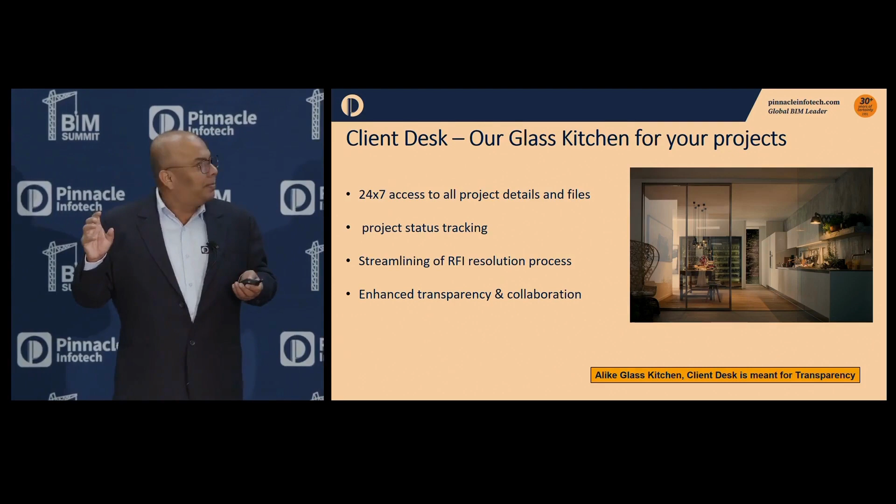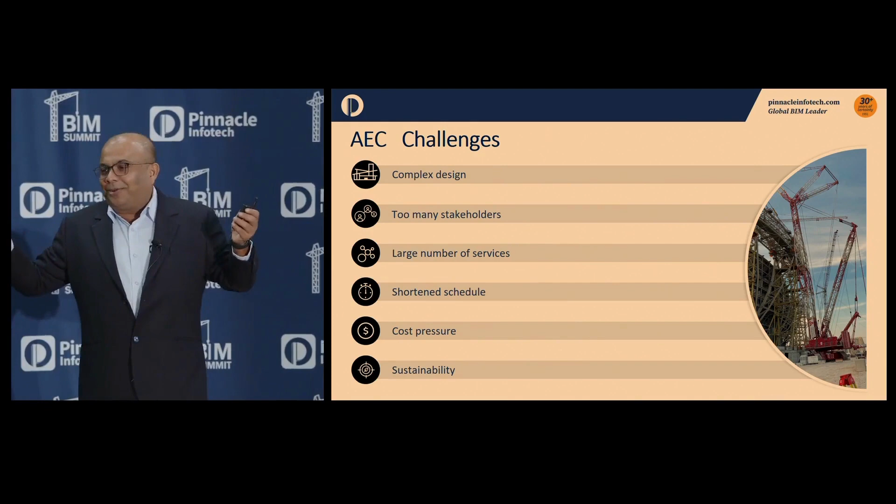Friends, our industry is very complex. Because we are working in different countries, architects don't want any columns, they don't want to give any ceiling space. They want crazy structures, the kind of things we see around the world, especially in the Middle East - the structures we see in Saudi Arabia or Dubai. Now everybody is competing for that. We have too many stakeholders.

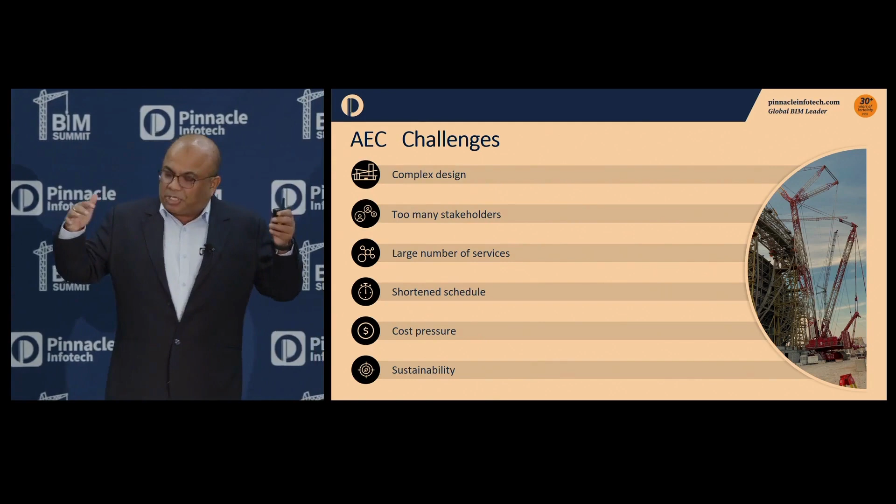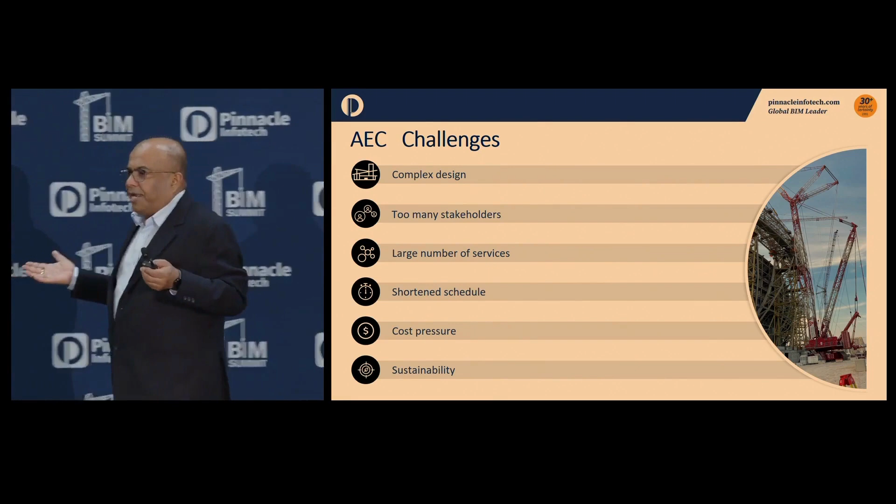Today, any specialty hospital or airport has at least 25 to 30 consultants, and definitely 30 to 40 sub-trade contractors, all working towards the success of the project. How do we collaborate between them? The number of services is increasing every day. 20 years back, airports and hospitals were very different from what we have today - the number of services has increased.

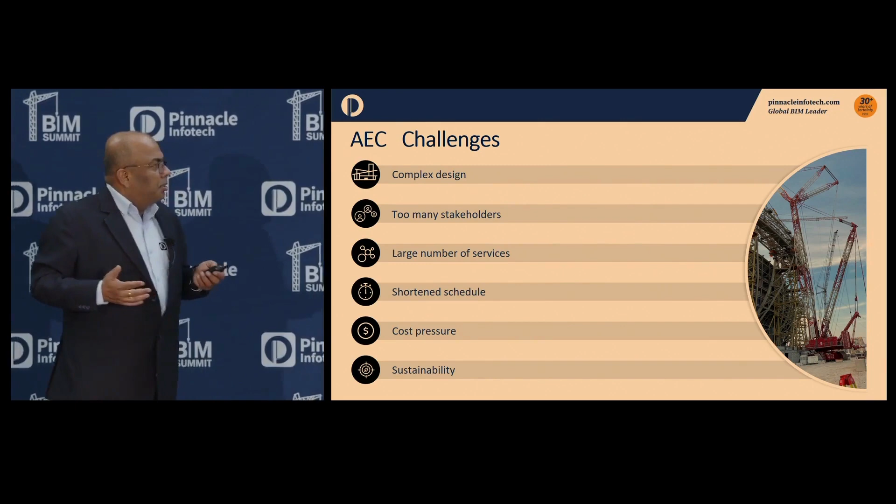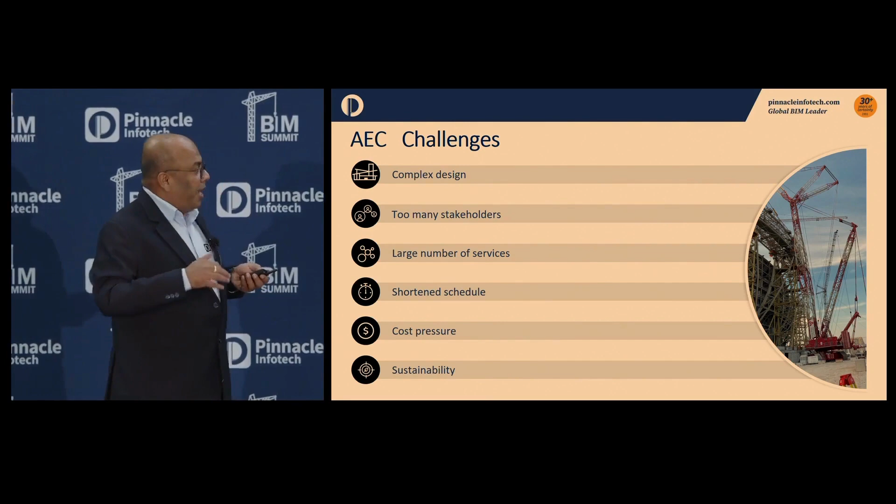Abraham Lincoln said, "Give me 6 hours to chop down a tree, and I'll spend the first 4 sharpening the axe." This is, I think, the statement for our industry.

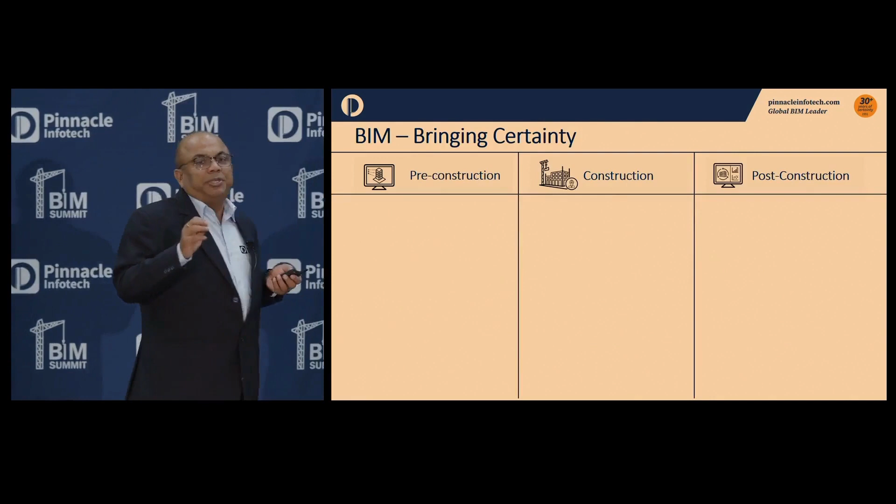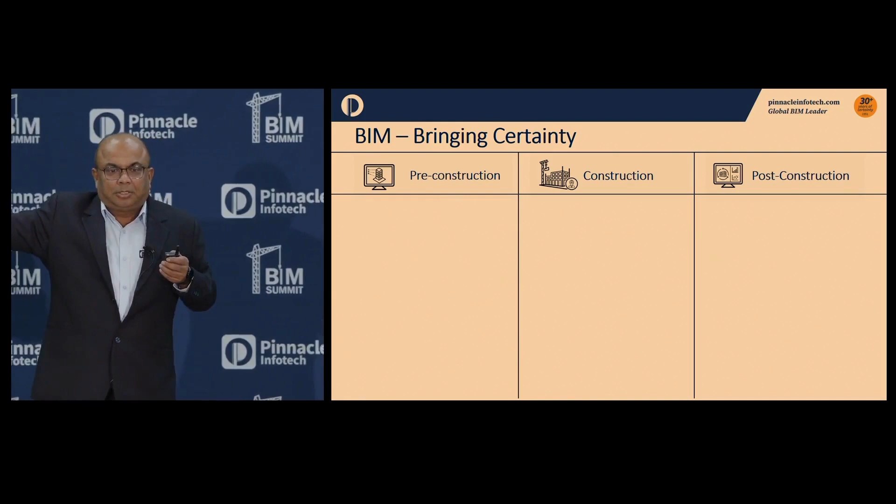Why do we say that? If our project duration is 18 months, and we can shift 2 months from construction to pre-construction, if we can create all the drawings, all the BOQs before we hit the ground, I challenge you'll save at least 3 months. And you'll be saving 10 to 15% costs, and you'll improve the quality and safety on the site. We have been proving this in every project which we are going to talk about today.

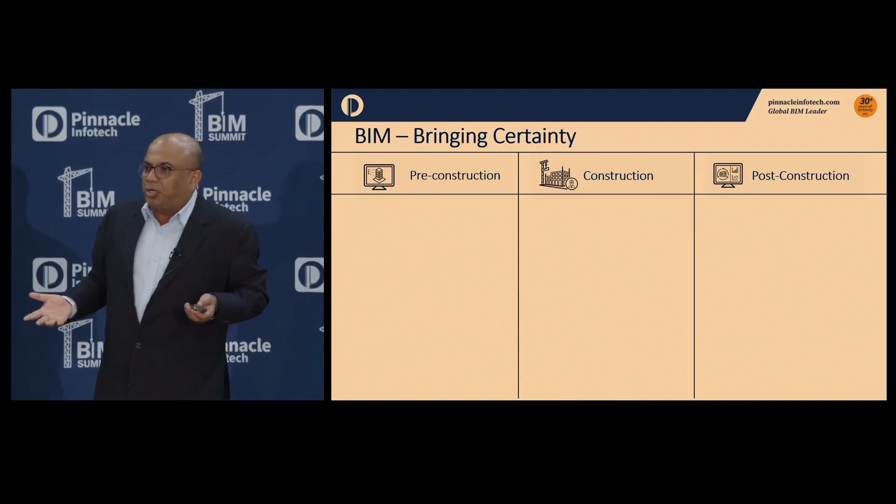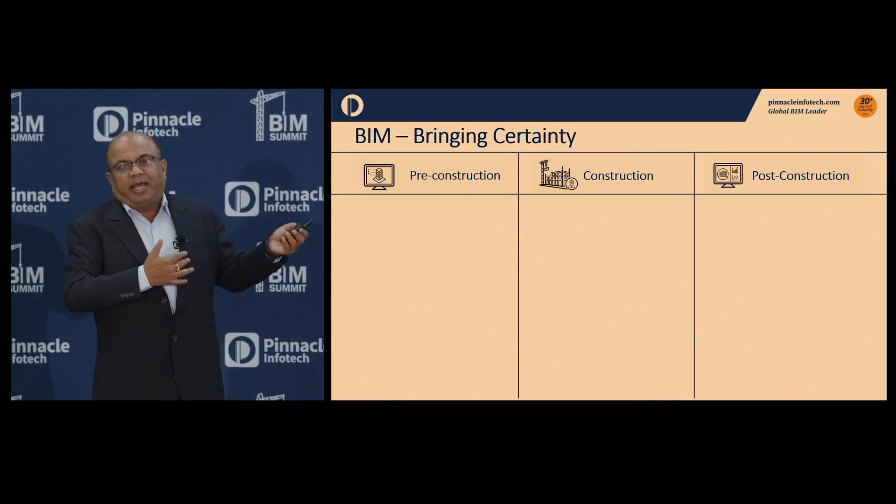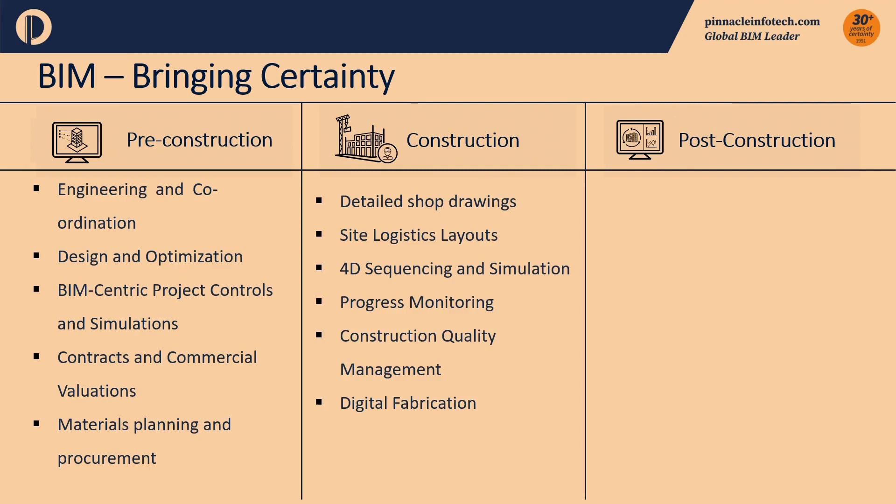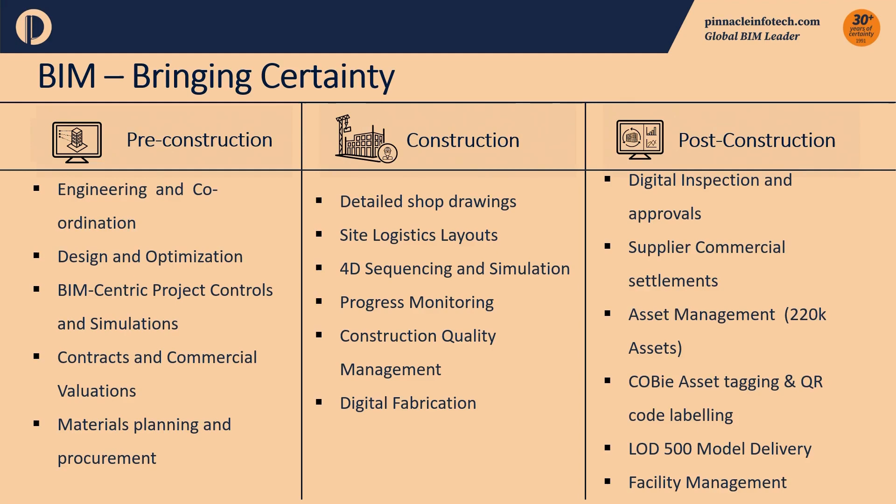We are really grateful to our speakers and panelists today who have come from different parts of the industry, thought leaders, and they will be telling us why Abraham Lincoln said that. So friends, with our vision, we decided that we will provide services end to end, from the concept design till the facilities management. Pre-construction is today what we think is going to make our project successful. During the construction, again, there are various things that we do, which we are going to talk about today. And the most interesting thing that we often forget is the use of technology for post-construction. That's the biggest wave that I see today.

Just to briefly tell you about our evolution, we started in 1991 in Durgapur, in the eastern part of India, where I was born and brought up. Our next destination, in 2002, we opened our office in Houston.

Then we went to Kolkata, another production center in India. We went to Dubai, where we opened our office in 2014. We went to London. We then went to Jaipur in 2017, and to Singapore in 2021.

And all these physical offices are manned by local experts. In each country, we have experts from that country leading our projects. And this was one of the most satisfying, Japan, which I believe is the ultimate scale for excellence, the gold standard for excellence.

Germany 2022, we opened our Atlanta office in 2022. We opened our Madurai production center, the largest production center, in 2022. And in Canada, we opened our office this year. So this has been our journey to different countries.

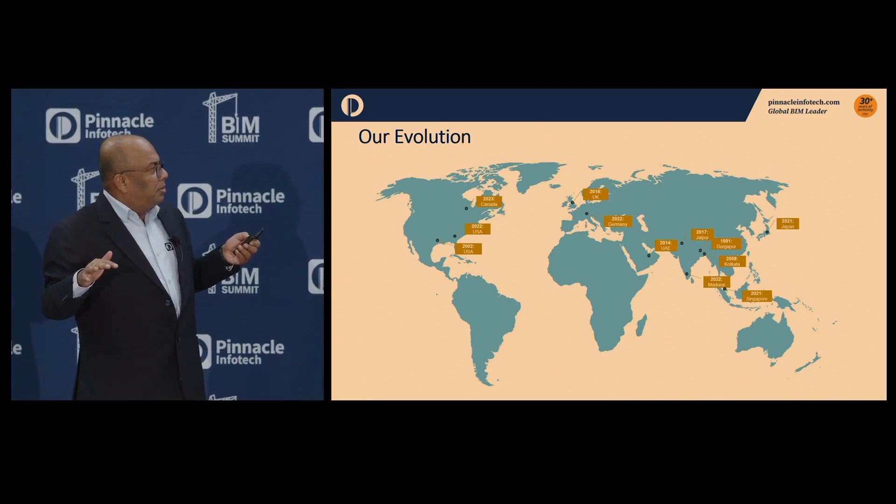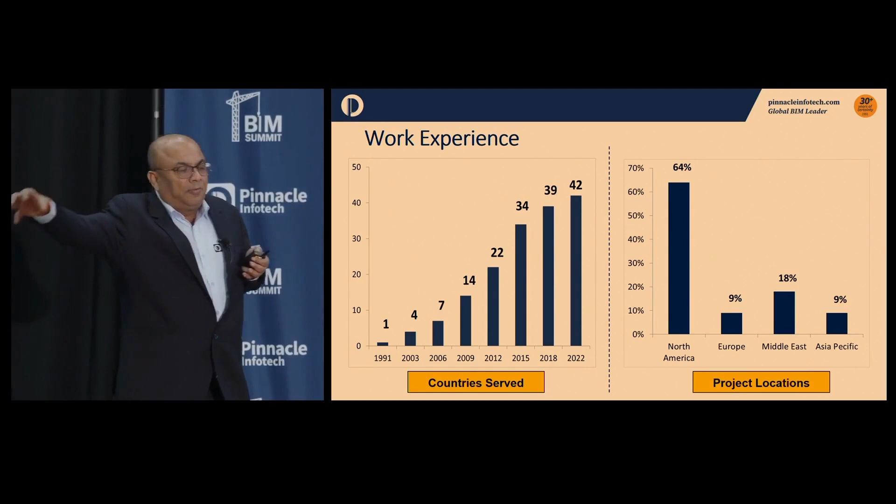This is how we are spread across the world, 42 countries, and it has increased this year. North America is our bread and butter, 64% of the work. But now we are spreading across the world, and BIM is getting more popular across the world. This gives us an advantage because we see pockets of excellence in every country, and we try to bring those pockets of excellence from Japan, from Germany, from Singapore. There's so much to learn, and bring it here. And here also there are so many great things that we do, we see, and we take it all over the world. So this has really helped the AEC community all over the world.

Friends, today, irrespective of the country, when we have design drawings, the design process is pretty complicated. We have different consultants and architects, and collaboration is a major challenge. Somebody has moved the doors, somebody has moved the walls, somebody has moved the columns, but have we informed others? Has everybody updated their drawings? What is the implication of a change? What is the implication if I change my glass? What is the implication of small MEP design changes that could have an implication on my structural drawings?

So all are interlinked, and currently the communication is pretty difficult. So the new paradigm shift that we see is a BIM integrated process. We now have one model, one cake, which everybody operates on. And we thank Autodesk for giving us that collaborate platform. And of course, there are others, Procore, and many other suppliers, where all of us can work at the same time. See, most of our projects that we work on are more than 1 million square feet.

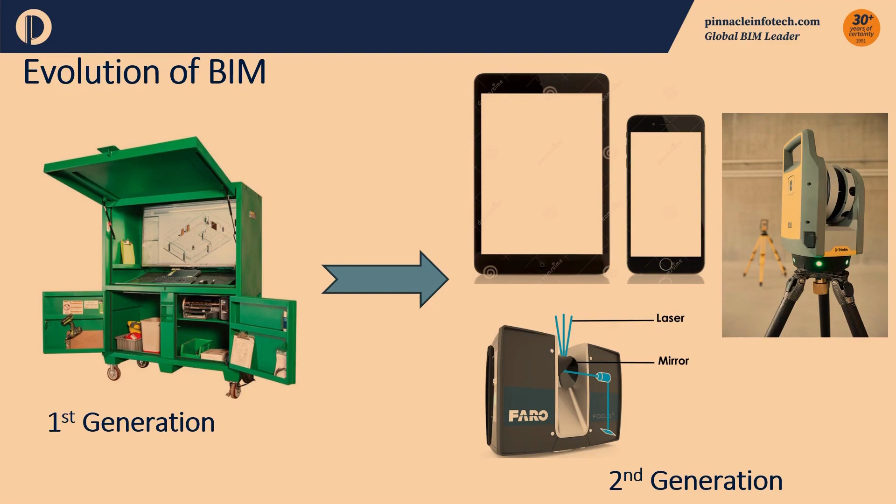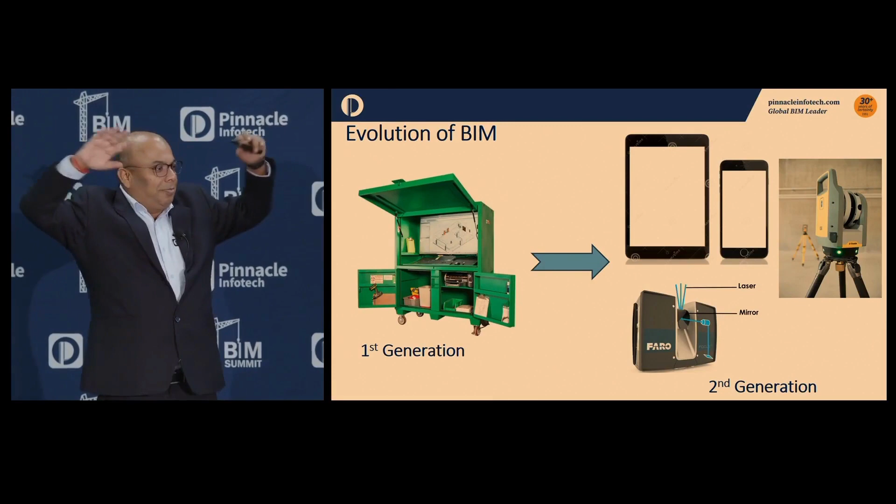So the first generation, when I started my journey, this is a site picture that I took. They had computers. They would assemble all the people in the trailers in the morning. All the concrete pouring team, guys, this is what we are going to pour today, these are the different levels. There used to be big screens. I've seen Turner Construction bringing those big screens on site, telling everybody what we are going to do, talking to the team, these are the different levels.

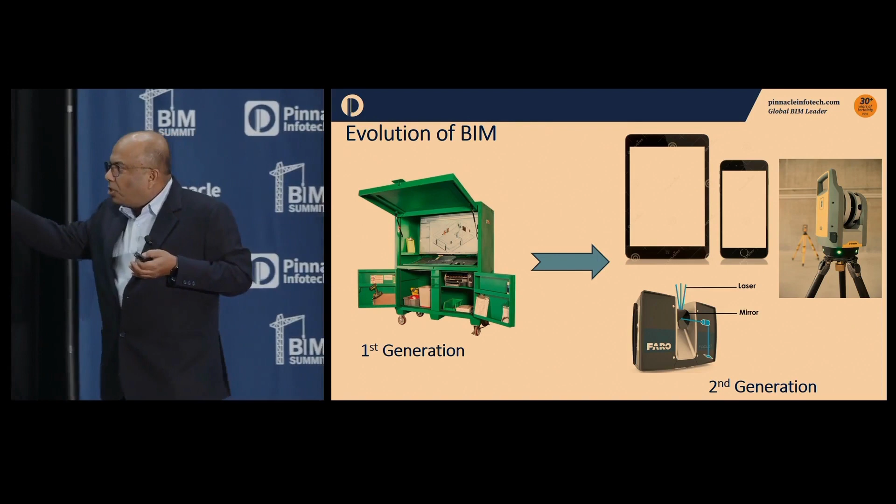These are the ISO, the 3D views of the stuff. That was really nice. But today, we have moved to a stage that if you don't have a laser scanner, an iPad, or an iPhone on the site, you are at risk, because your competitors are already doing that. So you need to make sure that you have moved to the second generation of BIM, and today we'll be talking about that.

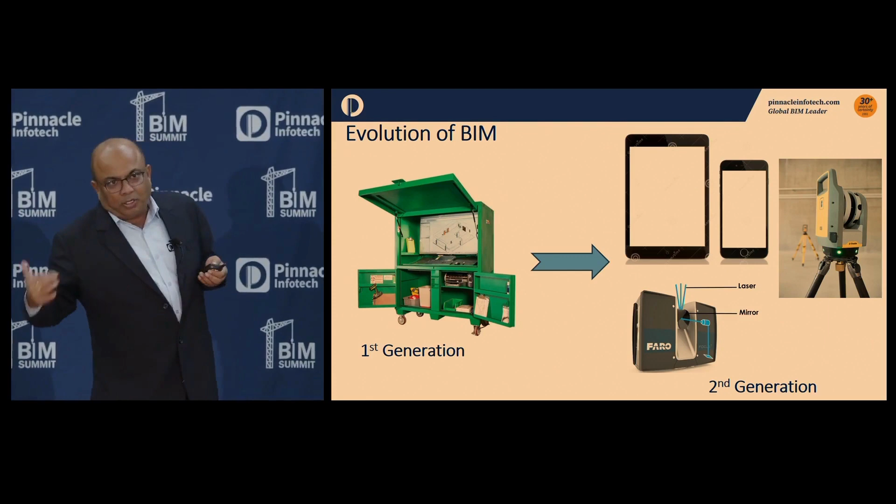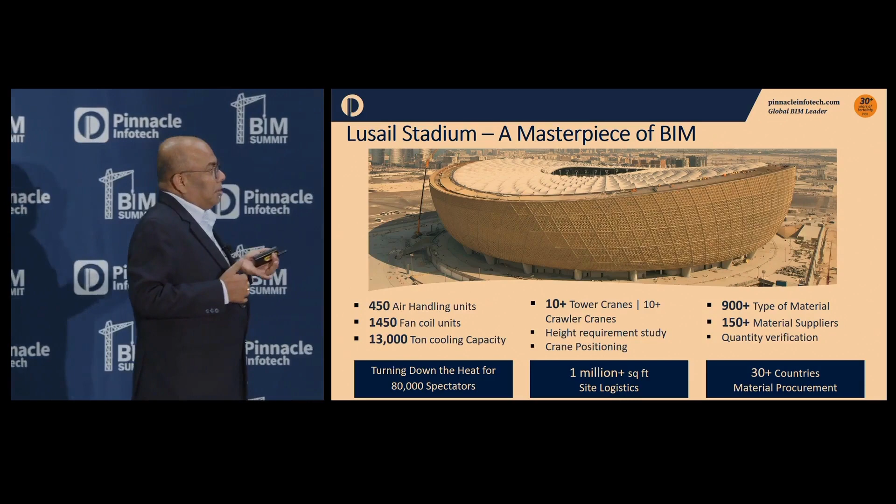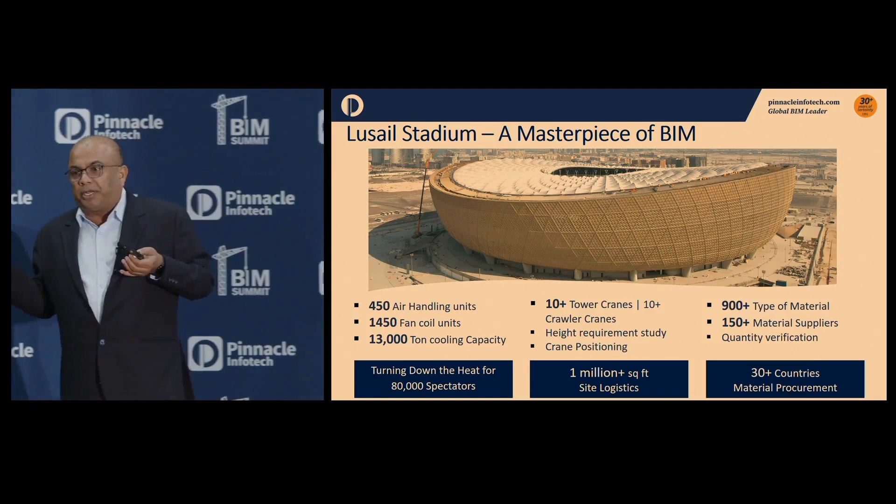Friends, this is just the example of the stadium that we built in 4 years: 92,000 people's capacity, 13,000 ton cooling capacity, 10 tower cranes, $1.5 billion project, 950 types of material. And in Qatar, you don't get anything, so everything is imported from almost 40 countries - 20 types of tiles, all from different countries.

So you got to be very clear. And that was one project that gave us the confidence. And that's why I tell you, with this one single model, we produced 35,000 shop drawings out of it. And at the end of the project, I asked the project director, what did BIM contribute to this project?

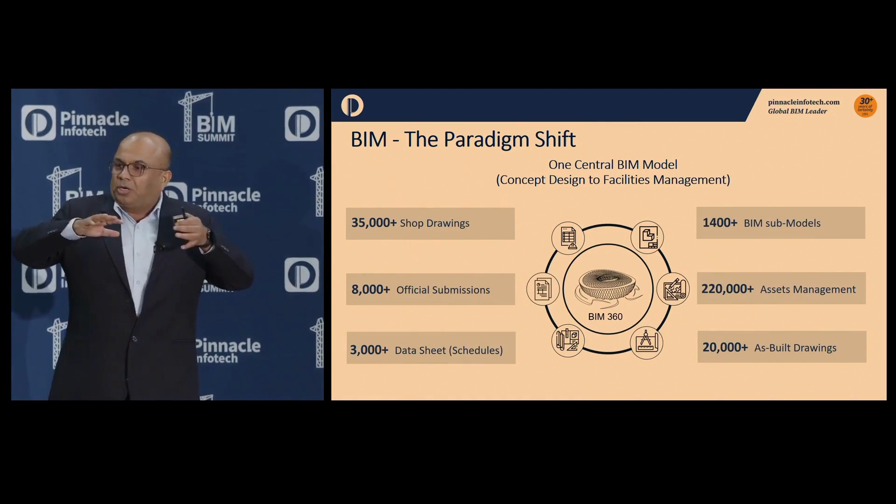And his answer was very interesting. He said, there were times when 25,000 workers were working on this stadium, and they did not need to talk to each other. Each one had their drawings. They just had to follow their drawings.

So that is the certainty we bring to the table: 8,000 official submissions, sub-models, 220,000 assets under management, and at the end of it, we handed over to Honeywell all the COBie data, and they were ready to manage this. This was the final stadium, the flagship stadium where the finals were played.

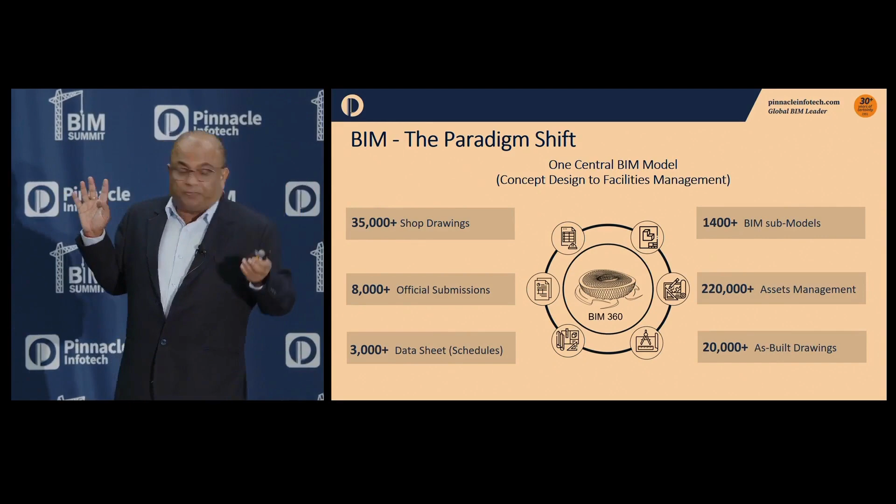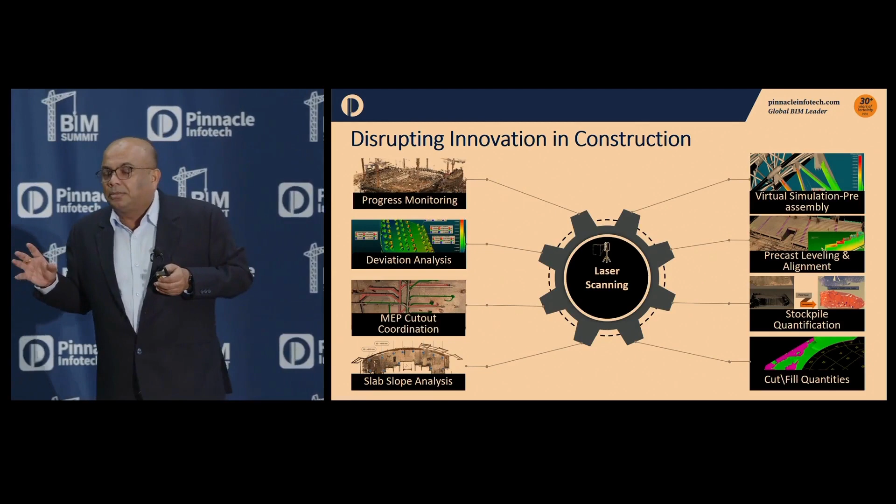This is the second disruption that we see in this industry: construction management. We are still doing it the old way, but these are all live examples of what we can achieve on the site just by using a laser scanner.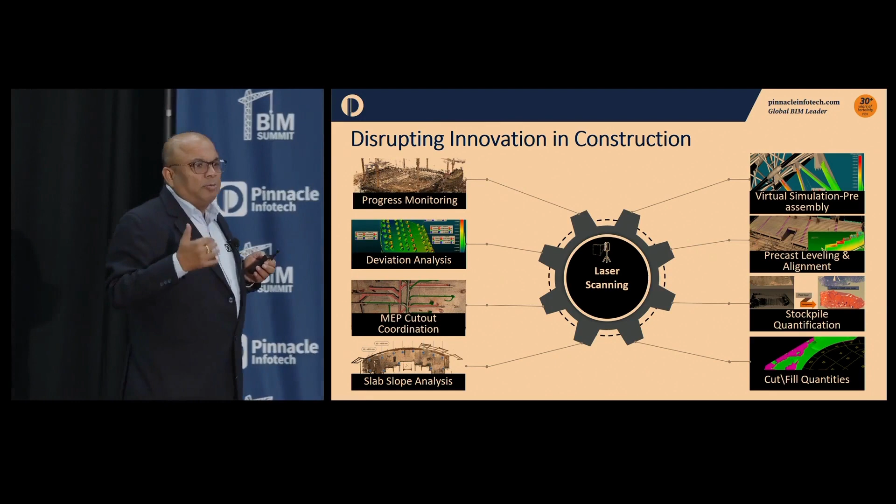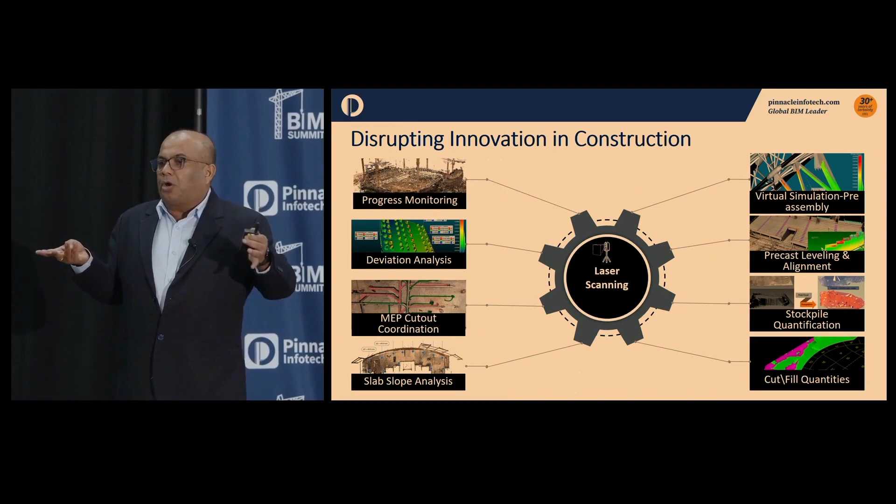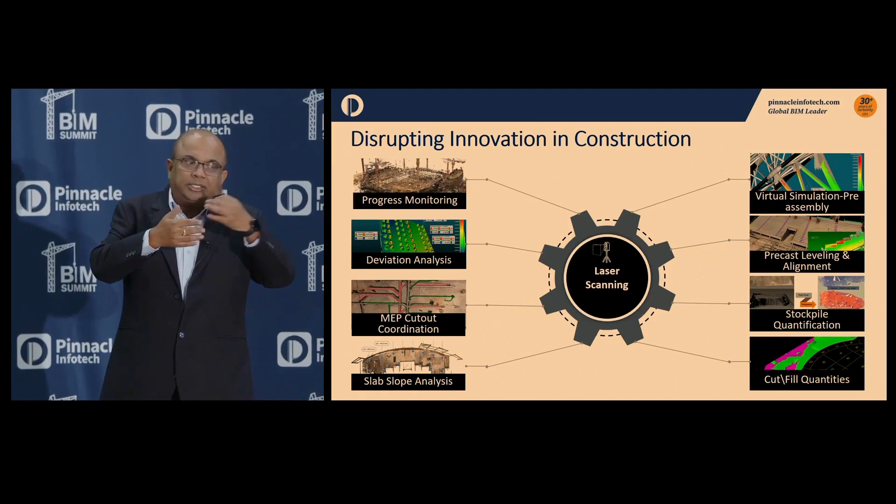Progress monitoring is a very standard feature. You have laser scanners, you scan the whole project once or twice a week, compare it with the planned 4D model you made in the beginning. So on 26th September, the project should have looked like this - you compare the models, see who is ahead, who is behind, and what is the action plan to get back on line.

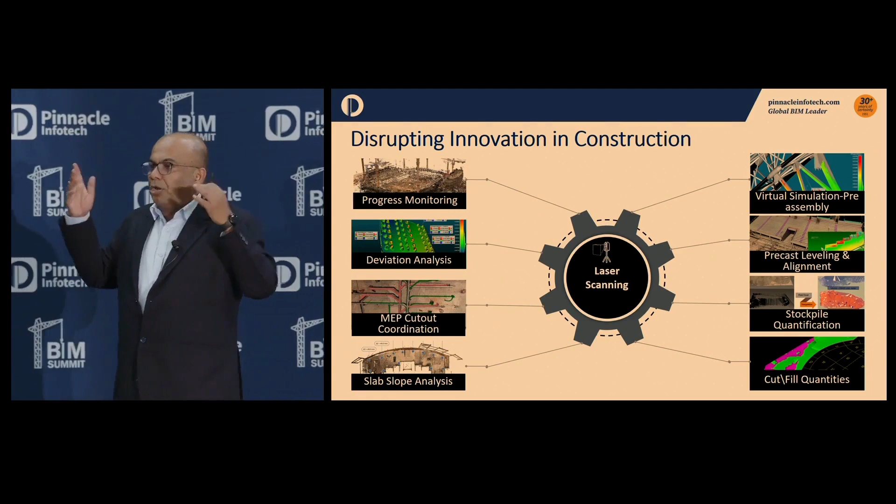Deviation analysis - this is amazing. So you're putting your formworks, your embeds in the evening, and you scan it. In the morning at 6 o'clock, you'll get a checklist of the embeds, the formworks, and the deviations. So before you cast your concrete or put your steel, you're already given the deviation analysis.

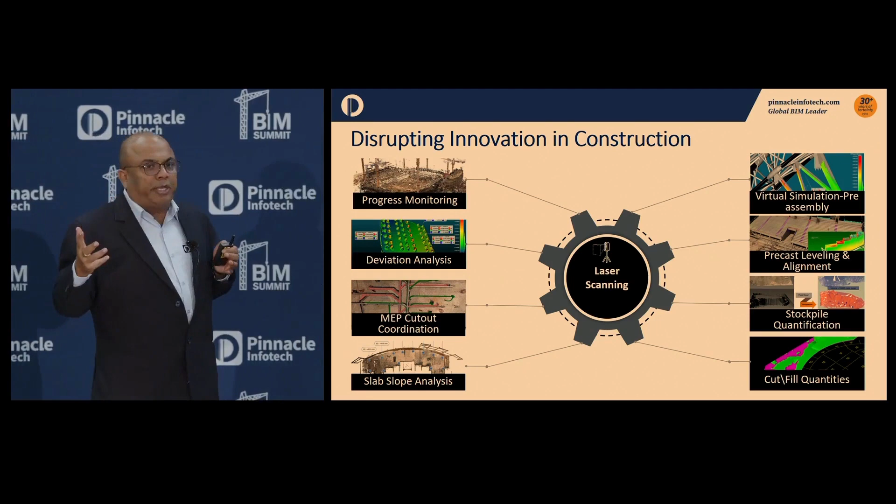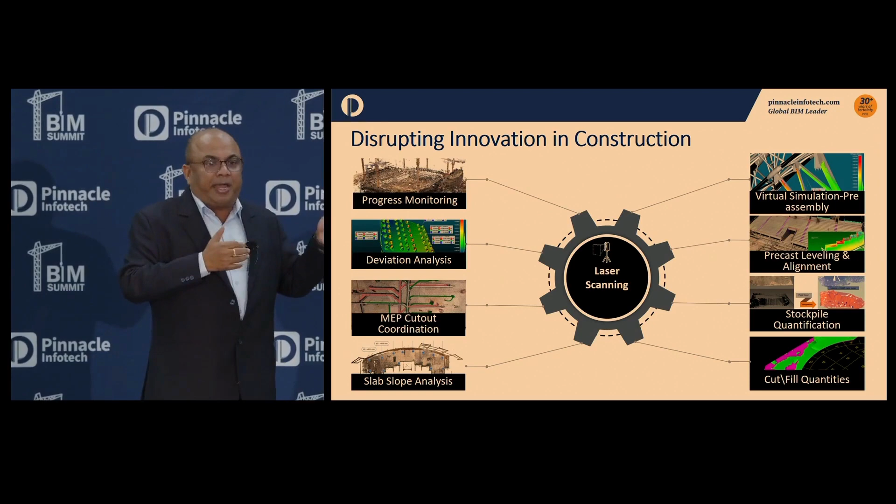MEP cutout coordination - whatever you may do, there are always small deviations when you pour concrete. The sleeves that you put on the deck, they always move sometimes. And you have prefabricated everything, so you need to know what are the changes in the concrete, even if it's a delta change. So you can scan it back, put it into the model, and adjust your MEP fabrication so that when it goes to the site, it fits to the T.

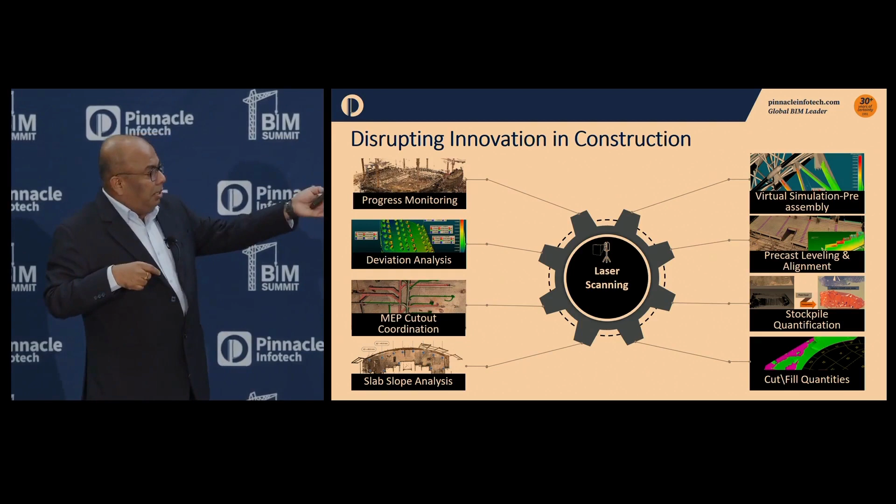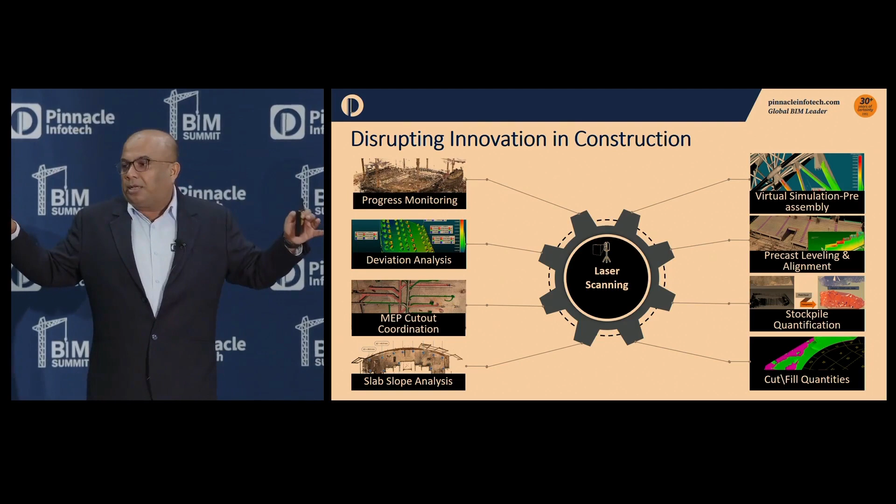Slab slope analysis - in fact, in this project we used this extensively on Lusail Stadium, because all the precast, all the seating, even the rakers, the beams - everything was precast. So it had to be aligned. There was no time for site corrections.

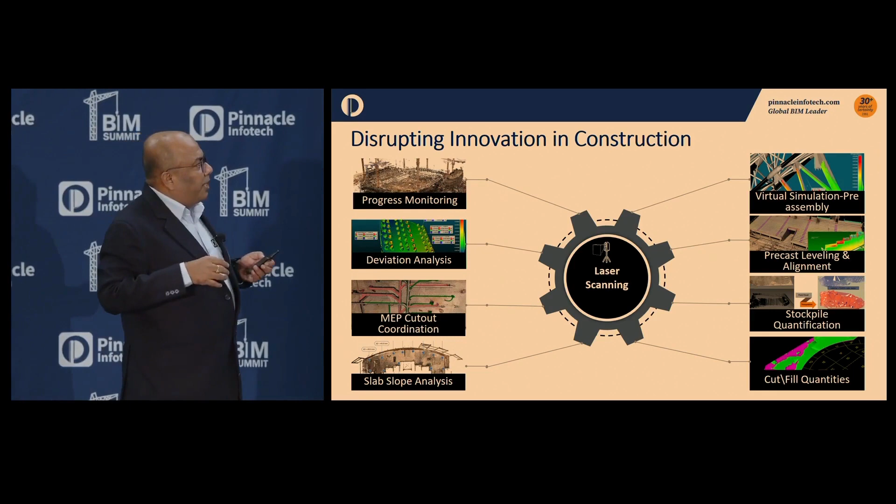The best was the virtual simulation and pre-assembly. I'll come to that. So what we were doing was, it had huge steel structures, and the steel structure was fabricated in China. You had the as-built conditions on the site, and you had no time. So what we did was we scanned all the vertical towers, and we told the fabricators to scan those 100 feet, 200 feet long trusses and send it to us. We gave them the deviation analysis, they made those changes, and then it was transported to the site. Once it was transported, we checked again and made corrections before the steel was lifted up - you only get one chance to lift the steel. That is what this project did.

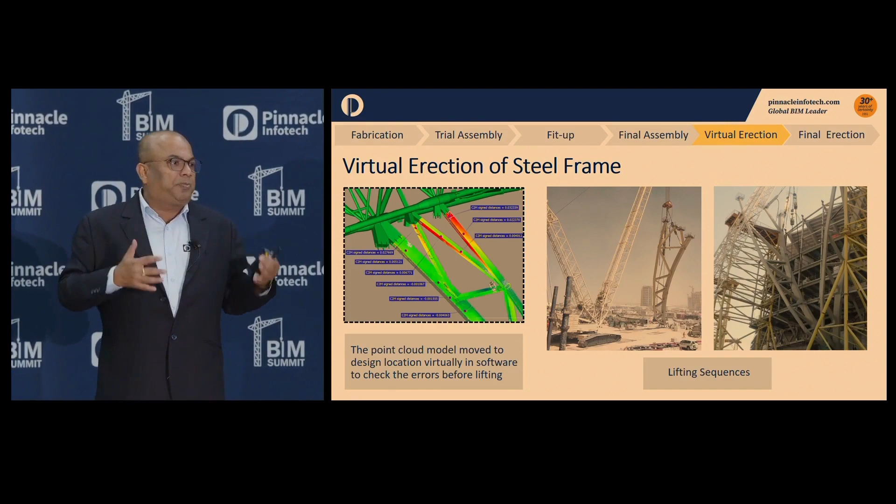So today we need - and I'm really happy that today we have some great speakers on construction automation. HP is there, and there are many other presentations from our team and other distinguished speakers.

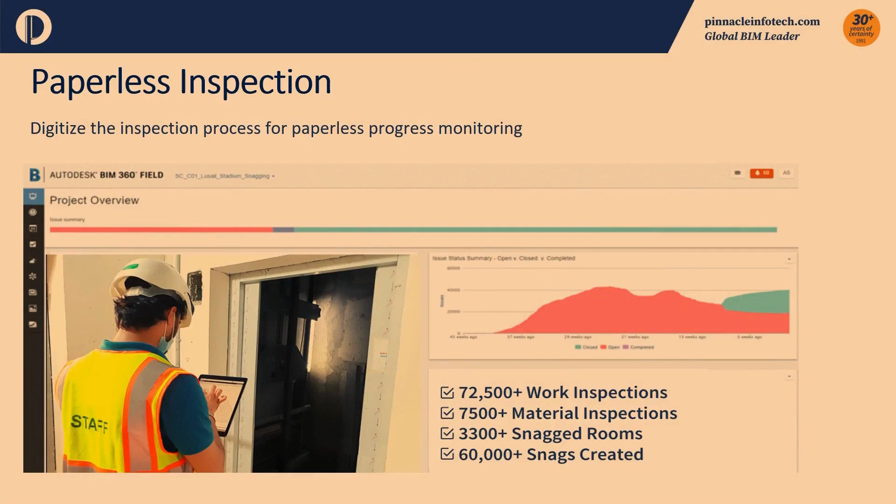Paperless inspection was another activity that came out of that. It was COVID time - you could not print any paper, you could not submit any paper for 2 years. And 72,500 work inspections happened online, and all this data got updated into the model. The inspectors then reviewed that data and approved it.

The third thing that is happening that I'm going to talk about today is automation.

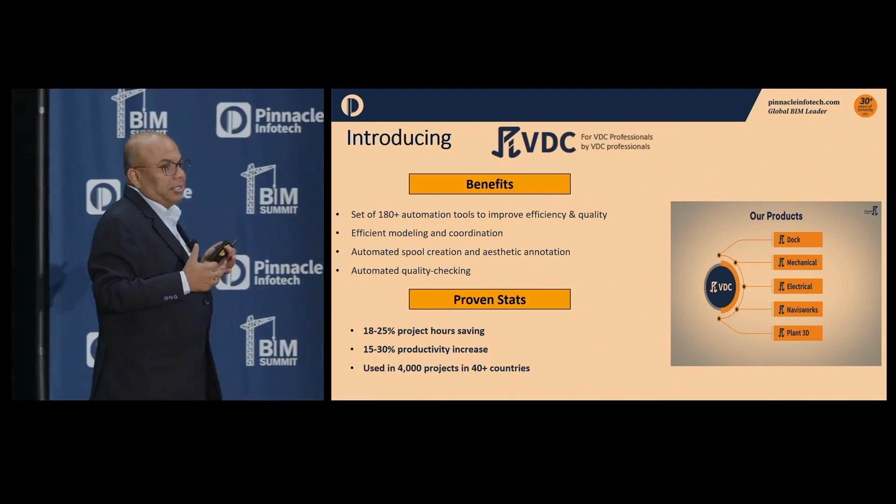Friends, we all suffer because when we are modeling, when we are preparing shop drawings, it's a huge manual work. There are a lot of adjustments, a lot of things that we do. Can we convert those 10 clicks into 1 click? Because that will not only speed up our work, but it will improve the quality - the fewer the number of clicks, the fewer the number of errors.

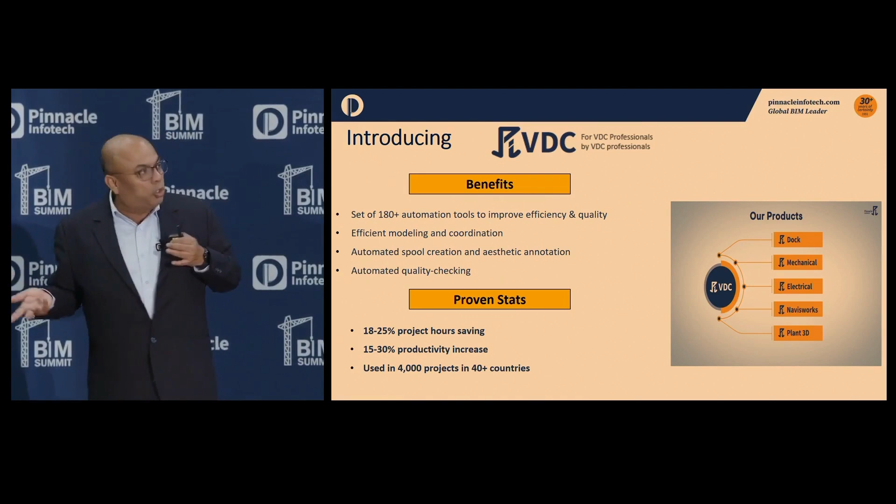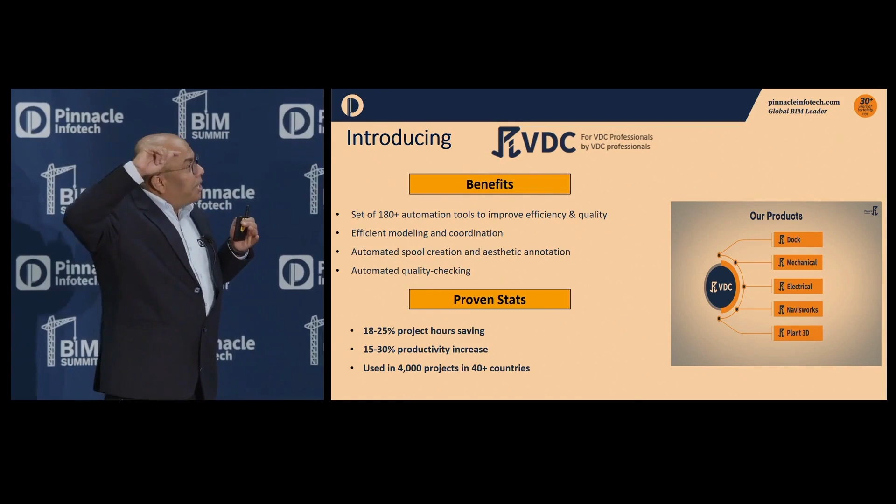So we have come up with PyVDC. There is a presentation today which is saving us, because this is by VDC professionals for VDC professionals. We are already 3,000 people.

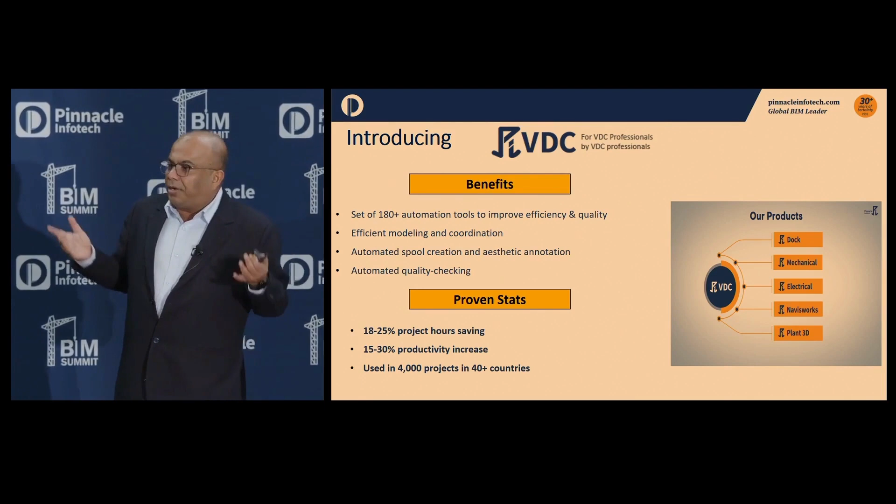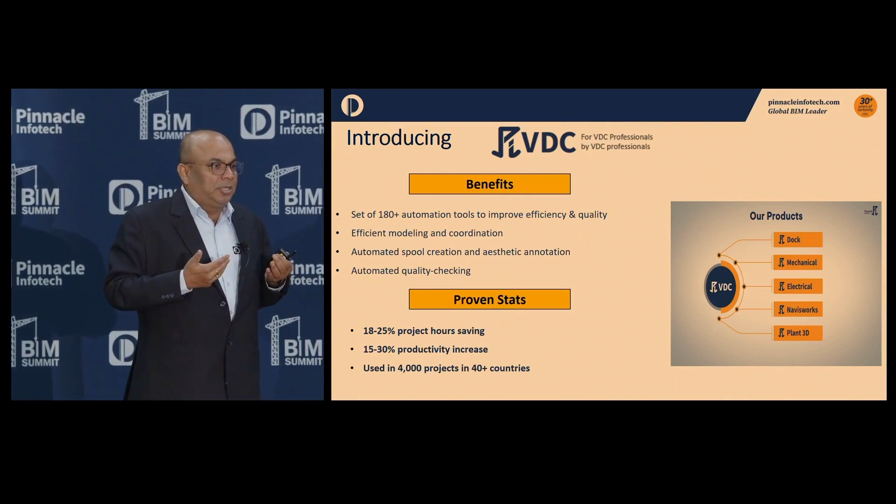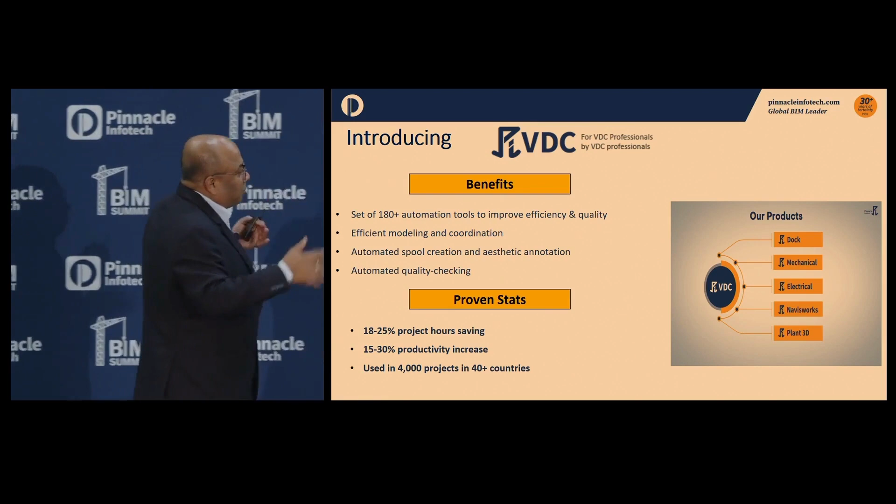And the users today - first our team, they were under pain, right? Every day they are doing this modeling and coordination and all these activities, and how to save time. So they gave us suggestions - can we do this? Can we do this? When we do that, oh, you could do this. Can we do this? There is no end to human greed. So we kept on improving, and we are very happy - it is a continuous process. We have almost 35 experts sitting in our office just working on that.

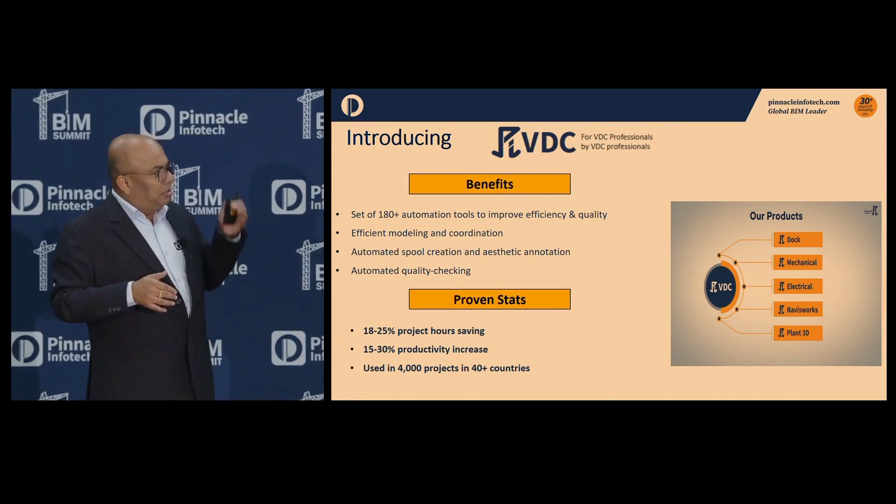Friends, another thing that we need to consider is the digital debt. 70-75% of a project is operations, and 95% of the construction data goes unused. After we finish the projects, all the models, everything is gone. So what do we do? That is very valuable data.

So what do we do? We use it for our facilities management. And this is what we are trying to do: maintenance not by schedule, but by analytics.

Let me give a very simple example. Say there are 500 dustbins in an airport. How do you know which garbage bins are filled and which are not? Somebody has to go sequentially to every dustbin to collect it every hour or two, whatever the frequency is. Can I put a sensor in every dustbin?

It will tell me in real time, as soon as it is 70% full, that somebody has to go and attend there. Then, with analytics of the previous data, we can tell our maintenance and facilities team: you have to attend bin number 23 now, then 26, then 34, then 76. It doesn't have to be sequential. We save a lot of time and improve the quality.

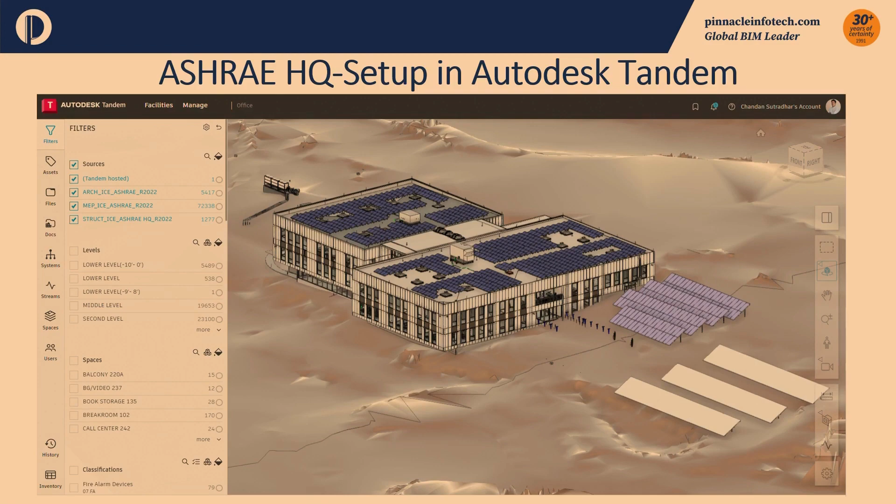We have Autodesk experts today, and we are closely working with Autodesk to make sure that using tandem, the whole final model can be uploaded to this solution. This is our project in Atlanta, and this is the ASHRAE headquarters - it will take in all the input data.

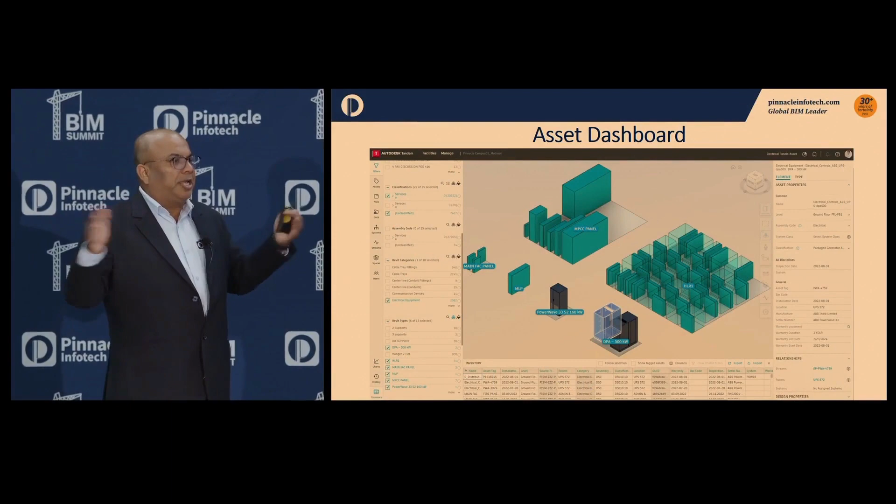And all the asset dashboards, all the IoT sensors you have, which tell you about the electric panels - what is the voltage, what is the PF, the different parameters, what is the temperature of the panels, air handling units, any equipment, any panels - we can keep these sensors and tag them to the tandem.

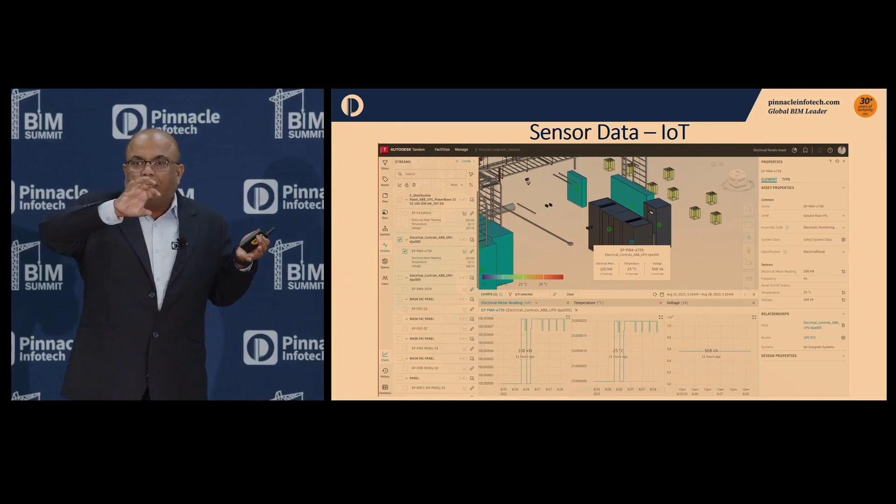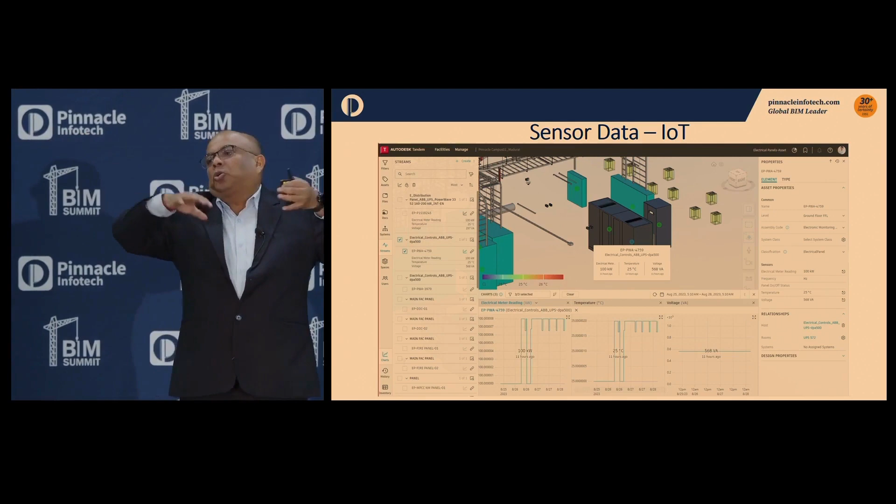So if we have 1,000 pumps in our facility, we can categorize them - these are green, these are yellow, these are orange, this is red - based on the data we collect through sensors. At one platform, it shows it all, and you can filter it and see it. The dashboards are really crazy.

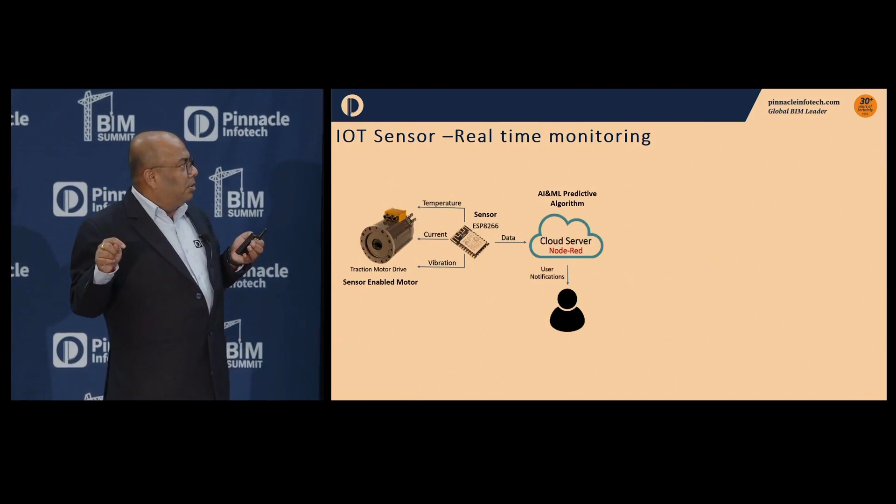For a few dollars, you can buy one simple sensor, ESP8266, which will give you the temperature, current, and vibration of the pump - wireless. Just add it to the tandem, add it to your model. And if you've got 5,000 pumps, 24/7, you know the health of all of them. It's like your car's dashboard.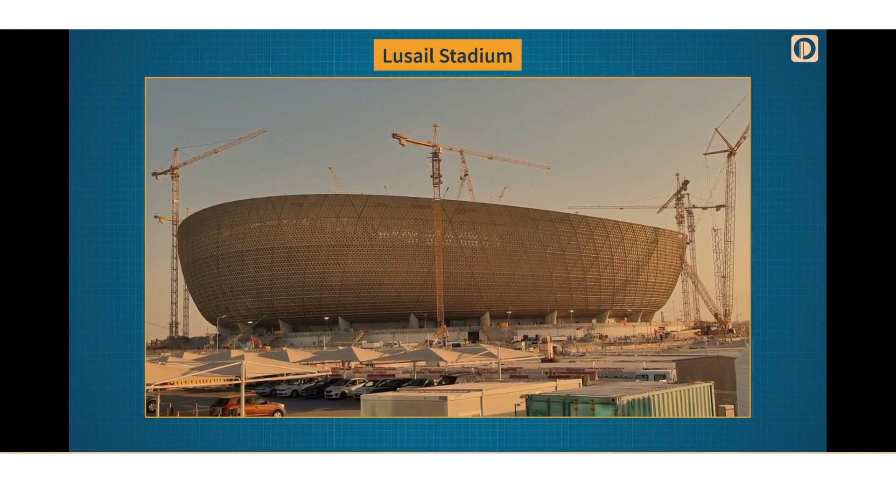From the historic Lord's Cricket Ground in England, where the spirit of cricket meets modern engineering, to Lusail Stadium in Qatar, we've left an indelible mark as a testament to world-class sports infrastructure.

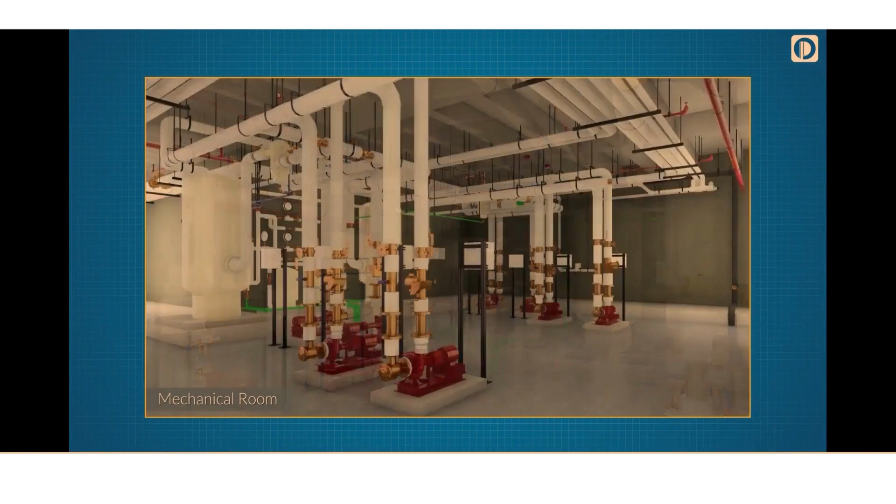In crafting the ASHRAE Global Headquarters and Berlin Data Center, Pinnacle Infotech redefined excellence in sustainable, innovative building design. These projects exemplify our commitment to implementing advanced BIM solutions, ensuring precise energy efficiency and effective data management.

Adding to our lineage of certainty, we have the Google Standort office building project in Munich, Germany, which is one of the most sophisticated commercial infrastructures of recent times.

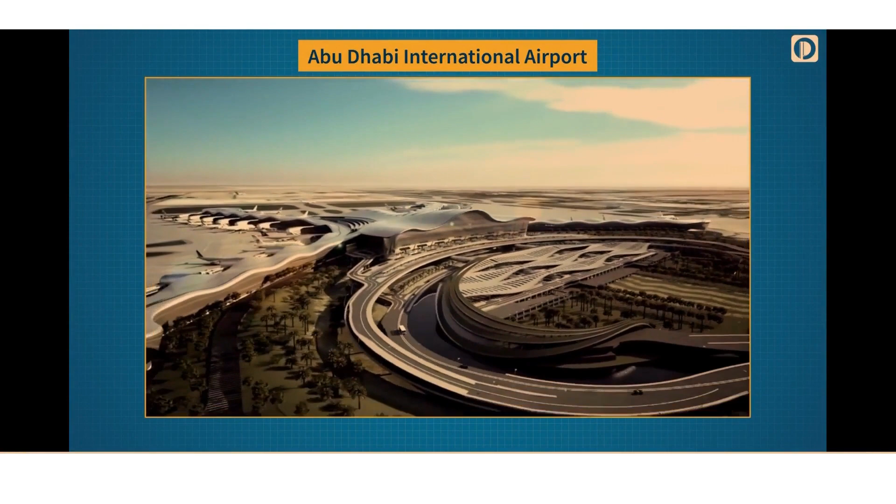With our BIM prowess, we've elevated multiple national and international airports, including Abu Dhabi International Airport, Cambodia International Airport, and Jewar International Airport in India, to new heights of modern aviation excellence.

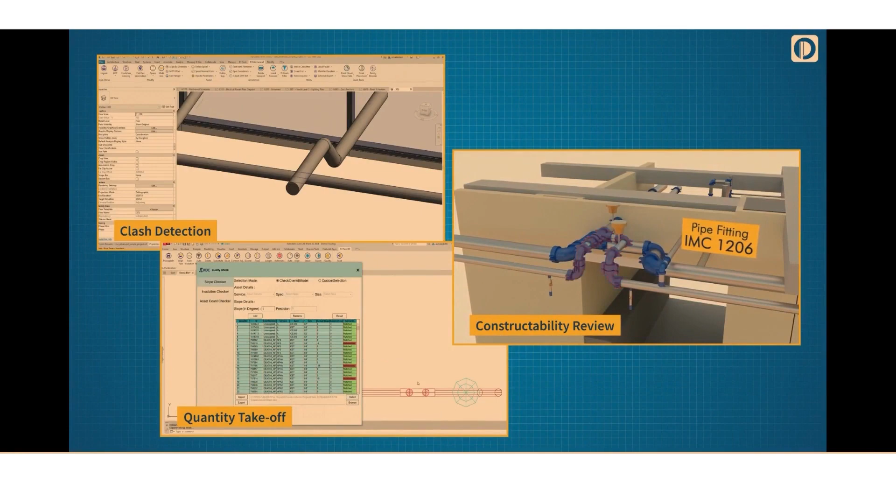Our meticulous clash detection, detailed quantity takeoff, and constructability review have ensured these projects soar, reflecting perfection and modernity, making them world-class aviation hubs. Pinnacle Infotech's unparalleled BIM services have transformed iconic projects like the Canton Spillway Dam and Wharf 8 in the USA, pushing the boundaries of precision and innovation.

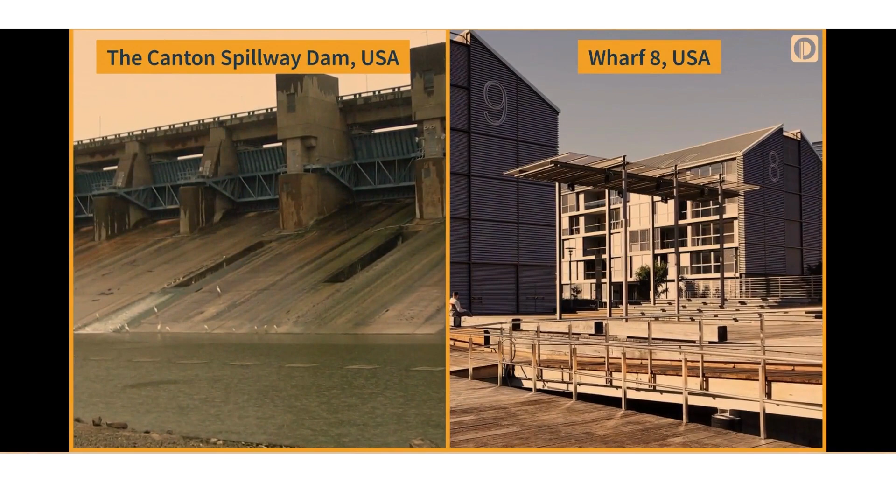In Southeast Asia, both the Singapore Metro and Pulau Tekong are testaments to our BIM prowess.

From the precision and efficiency seen in every station and track of the Singapore Metro, to the design-build marvel of Pulau Tekong in Singapore, Pinnacle Infotech's BIM expertise reshaped the architectural landscape extensively.

Ireland's new children's hospital is a testament to Pinnacle Infotech's dedication to healthcare excellence. Through advanced BIM solutions, we've created a space where healing and hope converge.

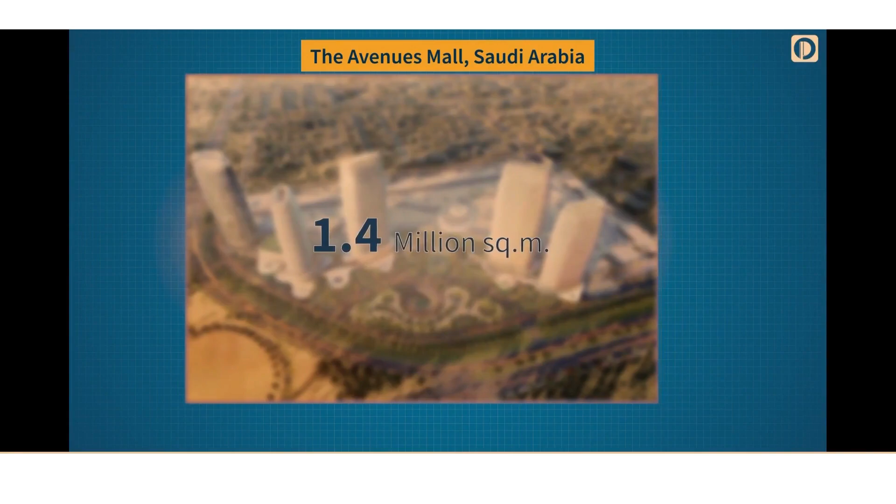Pinnacle has been a part of the 1.4 million square meter project, the Avenues Mall in Saudi Arabia, which is one of the iconic mall and residential projects in the region.

In Ayodhya, India, Sri Ram Janmabhoomi Tirth Kshetra seamlessly weaves tradition and technology together with our BIM solutions, preserving its historical importance with contemporary precision.

Pinnacle has also been the compelling force behind the success of large public undertakings like the Central Vista project.

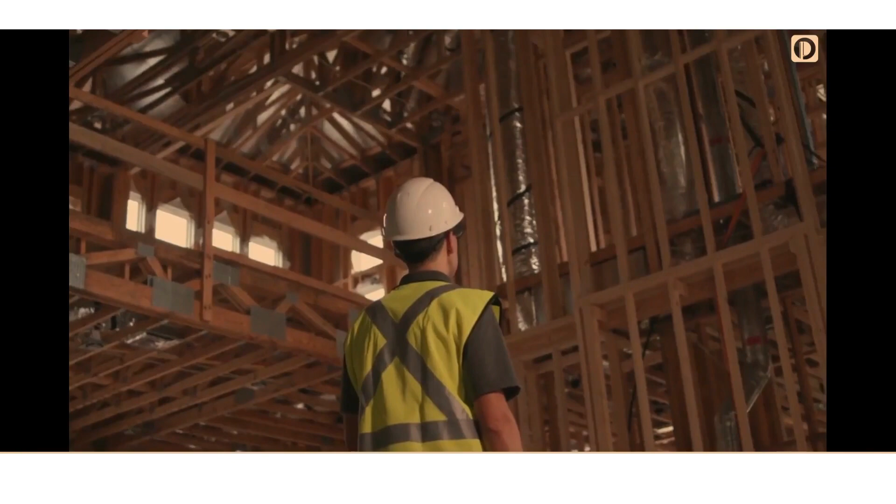Intersecting modern technology with immersive creativity, Pinnacle has powered the most innovative recreation projects, like the Center of Curiosity in Abu Dhabi, with its value-enabling BIM services.

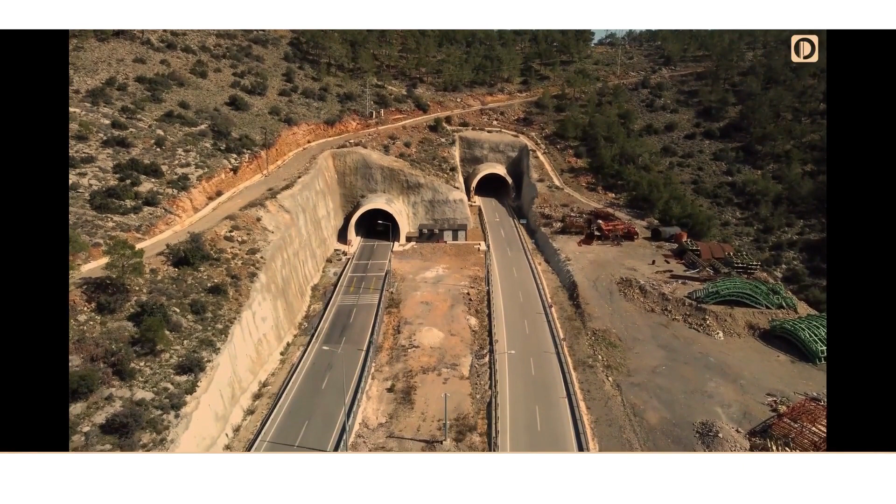Tunnels that pave the way to cross-region transportation make a critical part of the modern-day infrastructure of any country. Our expert engineers and BIM specialists have competently addressed the extensive needs of projects like Cliff Loop and Tunnel in

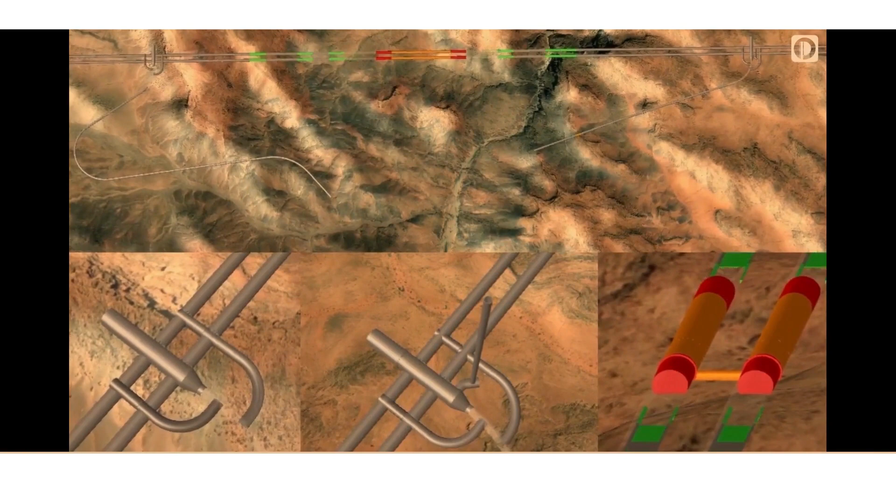Hougang International Station and Tunnel, to get them the most robust and functional passage structures.

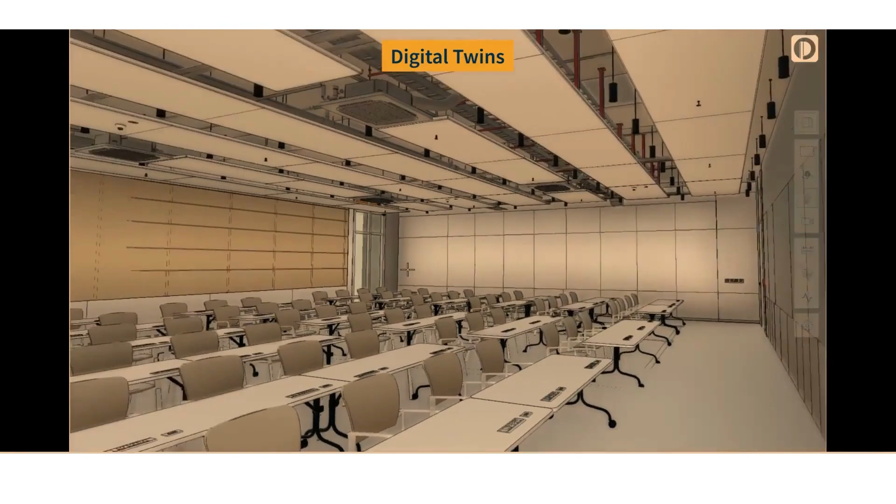We also bring you the future of construction and building management through digital twins, a technology that creates intelligent, dynamic replicas of your assets and facilities management, ensuring they operate at peak efficiency.

That's not all. Our R&D team and 2,400 plus in-house BIM engineers have developed Pi Dock, a set of groundbreaking tools for Revit and Navisworks for automating repetitive tasks with state-of-the-art AI capabilities.

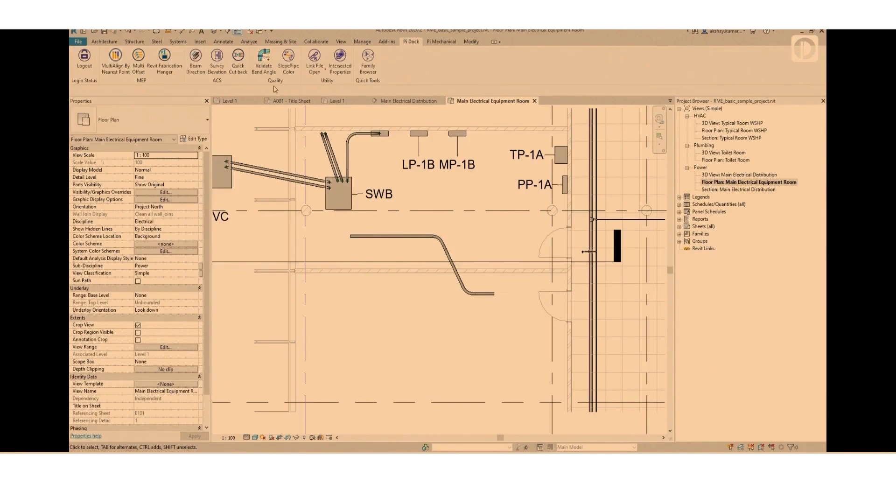It supercharges productivity by up to 30% and saves you an incredible 18 to 25% in project time.

Our strength lies in our global presence, supported by a skilled team of architects, engineers, and BIM experts. The Pinnacle family is united by a shared passion for innovation, excellence, and a commitment to delivering results that inspire. Our foundation is built on unwavering standards.

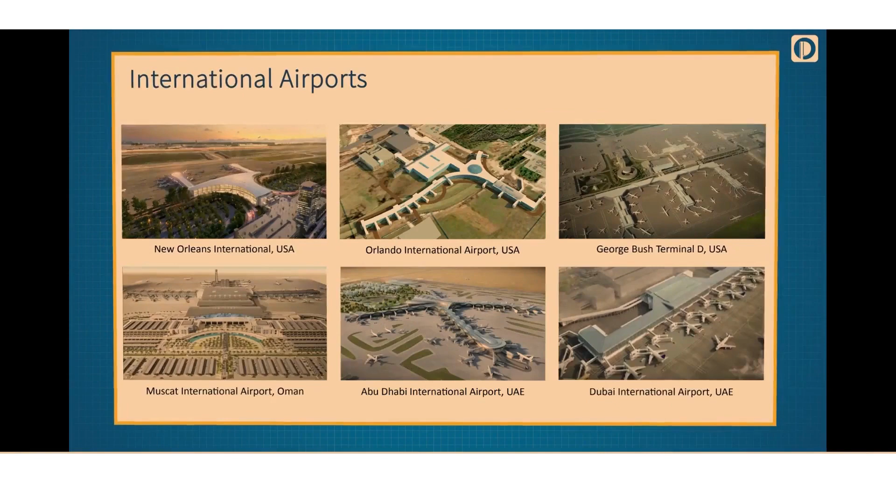ISO 19650 and ISO 9001 are more than just acronyms. They're the pillars of our commitment to quality. With these standards in place, you can trust that we're dedicated to delivering the very best.

Join us as we embark on a journey to create a world of architectural wonders, one project at a time. Pinnacle Infotech, changing the global skyline. Optimize your construction processes at pinnacleinfotech.com.